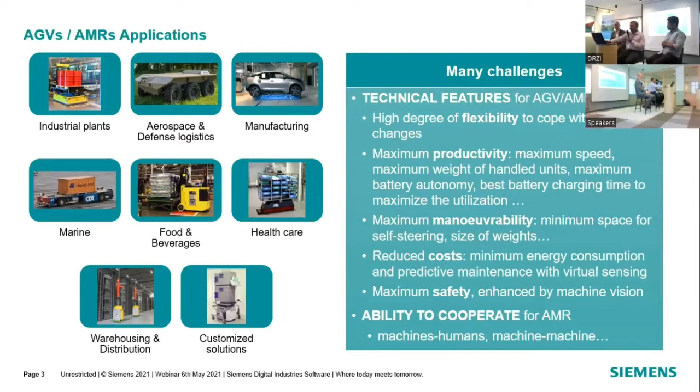Then, as I mentioned this morning, it's not how good your product is. The most important is a good product coming to the market faster. Okay, that's the most important. Everybody is rushing for time, and only those who bring the product faster are the winners and survive in the market, right? So these are the challenges that AGV and AMR manufacturers or designers face.

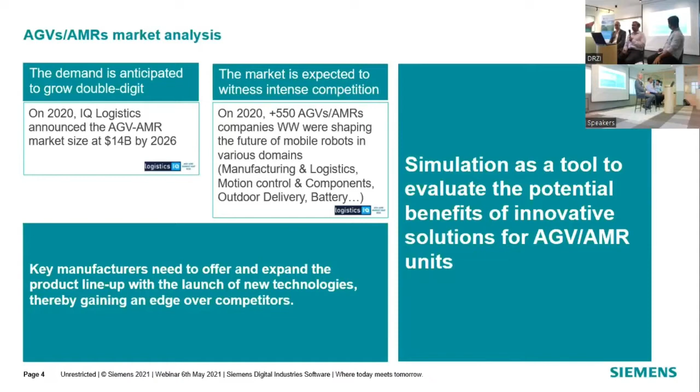And this is what I want to share also, how we see the market and its potential. You can see this is around a 2020 fact, and almost 550 plus companies are looking into that, developing different concepts, and they see logistics as one of the bigger things.

So now, what are the requirements? If you are going to design a new AGV, what are the typical challenges? The first one is sizing and validation, the same as the previous session. An AGV is going to work with batteries and a motor, so this needs to be optimized. I cannot put too much power when the battery has less capacity. So I need to optimally balance so that I put the right motor as well as the right size battery. The second thing is how this is going to work in the actual environment, virtual commissioning.

Then the third one is, if this is autonomous, how it senses and how it takes decisions also needs to be simulated. Then there's range, because this is what everybody wants to maximize, right? How much I can get on a single charge. The other two things are more related to how this is going to perform in the real world: how it can sense the environment, and how it can integrate the rest of the things like material handling, if you have pick and place or any specific arms.

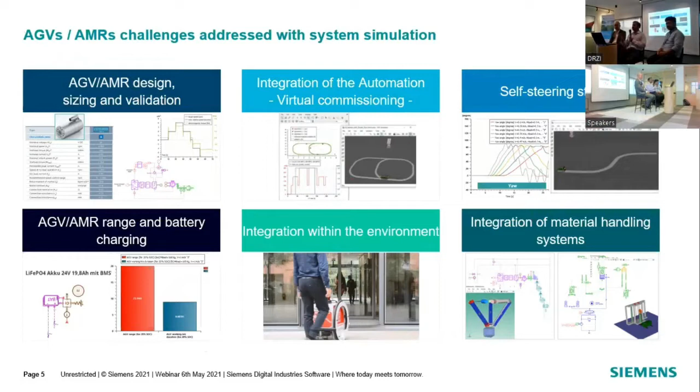So now, this one slide summarizes what we have. What are the solutions? The topmost solutions we call system simulation, and they can validate the designs well before you build the CAD models. So you can think about using X number of batteries in series and cells in parallel, then take the motors and see how this is going to work before the CAD model.

The second set of solutions is what we call 3D simulation. Basically, you bring your CAD model, your CAD geometry, then you simulate it for structures, how strong it is, and how it's going to behave in terms of stability and all. The third one is more about test.

So whatever we simulate, we need to also verify that this is accurate. So we have the test equipment. We can see there are a number of data acquisition systems as well as test-related software. So I'll go one by one, just to brief that.

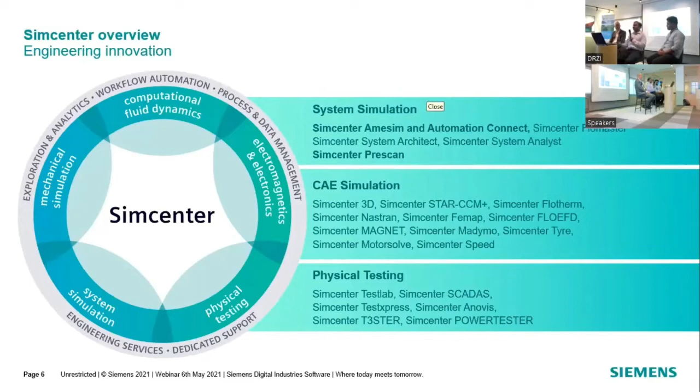So the first one is the system simulation, and in this system simulation, you can see this value. The whole AGV is comprised of multiple systems. You have mechanical systems, you have electricals, controls, there are multiple things. They all have to behave together. So this solution helps to build your model in the virtual form. You can see there's electrical, fluids, thermal, mechanicals, and so on.

But basically, if you ask me in another word, I would call this the Lego blocks of engineers, right? So you can see here each block you can stack together and then you can build your models and validate your models. And the advantage of this is you can see in this picture, this is a green color, and this is a purple color, right? This is electrical. So each color represents a different set of physics.

So basically, you bring a battery, then you wire it, you connect the motor, then the motor converts the electrical energy to mechanical energy. Then you use the gear systems, that is the mechanical systems. Then if there is heat dissipation, there's a thermal model. So in a way, it is a Lego block. You stack together and see how the whole system behaves, how long you can operate, and then you estimate.

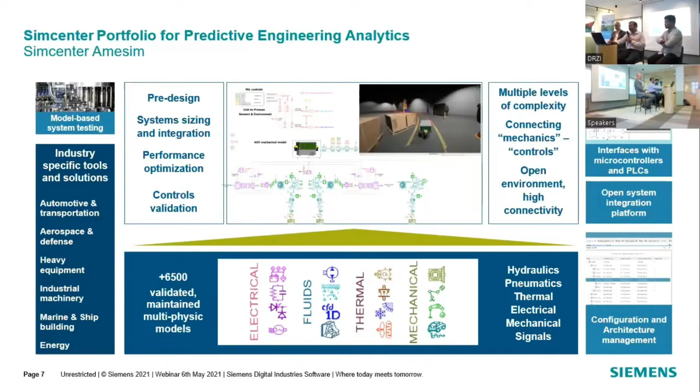So the next set of solutions is more specific. The previous one is a solution for mechatronic systems, so you bring different systems together. The next one is more on autonomous-specific solutions. Here you can see how this tool is working. So basically, autonomous systems behave in the same way as humans, how we recognize the environment and how we take the decision based on that. The only difference is they use camera, radar, LiDAR, ultrasonic.

So these inputs need to be validated. This input needs to be collected. Then you develop the algorithms based on the recognition. Then the systems take the decision. And these control logics, these algorithms need to be verified. So in case you see a person or somebody is moving, then you can decide this AGV needs to be stopped, or maybe take a left and go, or take a right and go, right? So this needs to be validated on the basis of how you develop the algorithm based on the radar inputs and so on.

So basically, the Prescan solution is a tool that can also talk with the previous system simulation, Amesim, right? They can talk together. So this tool verifies your control algorithms as well as autonomous capabilities, whereas the rest of the whole vehicle behavior can be verified in Simcenter Amesim.

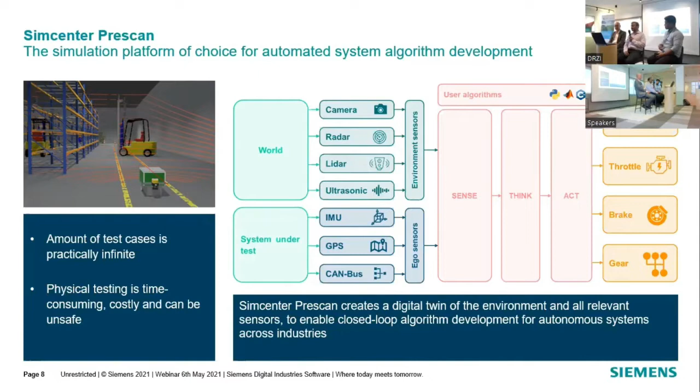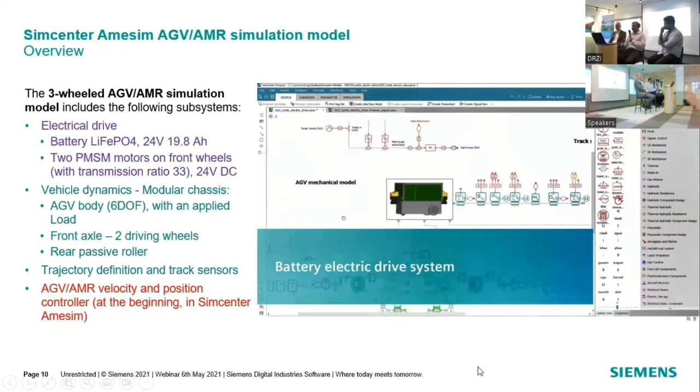Here you are modeling the AGV, and you can see some of the physics is in the electrical systems. Then they are connected to the mechanical systems, that is the tire and the gearbox, then the electric motor. Then you can define your trajectory at which this AGV needs to go, right? Then you can also trigger the scenarios of acceleration, steady speed and stop. Then you run the simulation. It can simulate the battery behavior as well as the vehicle behavior.

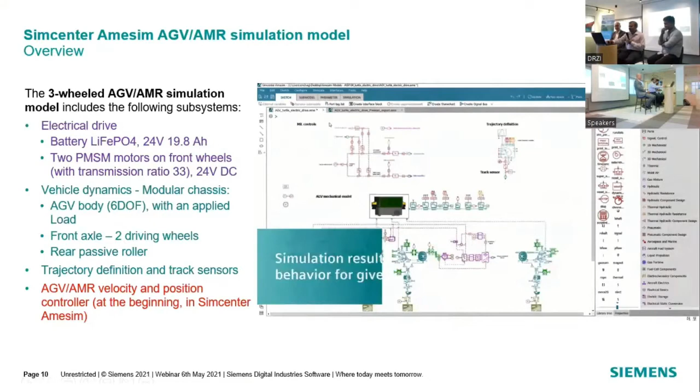So the next one I wanted to talk about is the results. For example, what is the maximum speed I can use? And what if I increase the height of the load, right? So these are the different scenarios. If you see here, this is the solution showing how, by increasing the height or increasing the speed, this will deviate from the original intended trajectory, right? The same thing goes for the velocity increase at different trajectories. You can see the performance.

Then you can also see other studies by increasing the weight. Of course, if you increase the weight, the electric motor is going to lose its speed, and you can also see how the trajectory is going to change, right? So yeah, there's a height increase, the shape of the trajectories.

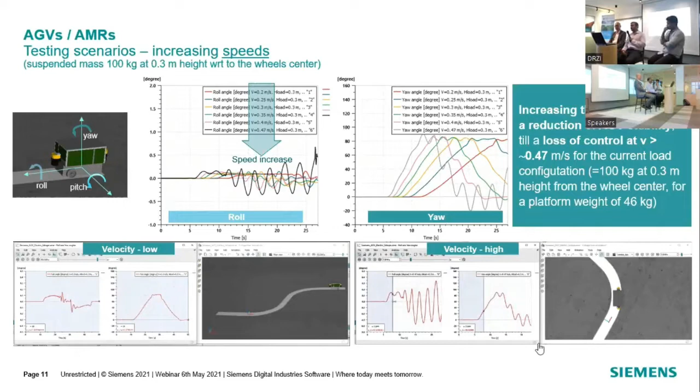The advantage is, before you deploy this in the product in the actual world, you know how this is going to work, and you can virtually fine tune your PLCs against your product. And there are two ways to do it. One is called hardware in the loop. The second one is software in the loop.

With software in the loop, without the physical hardware, you almost mimic everything you have. But with hardware in the loop, when you have physical hardware, a real PLC, you can connect and exchange data with your PLC. That's the difference. Both are possible when you have models in the Amesim.

So this is one of our case studies that I wanted to share, SIMOVE, right? And here, how concurrent engineering, hardware and software in the loop work together, and how this can be validated in the various stages of the development.

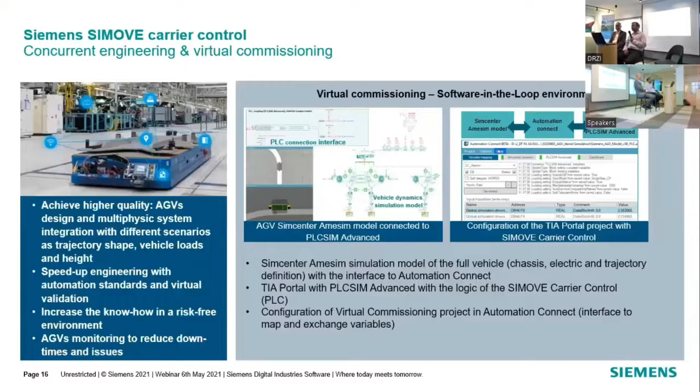The next one I wanted to talk about is more on the software in the loop. So in software in the loop, probably you have teams doing different things at the same time. For example, if you have a controls team using MATLAB, or a mechanical team using CAD models and mechanical models, these solutions can connect with the different systems, and then you can optimally fine tune your physical models.

If you change the motor, what will be the impact? In the mechanical aspect, it is going to affect some of the stability. But if you modify some controls, you can also fine tune the control logics in this.

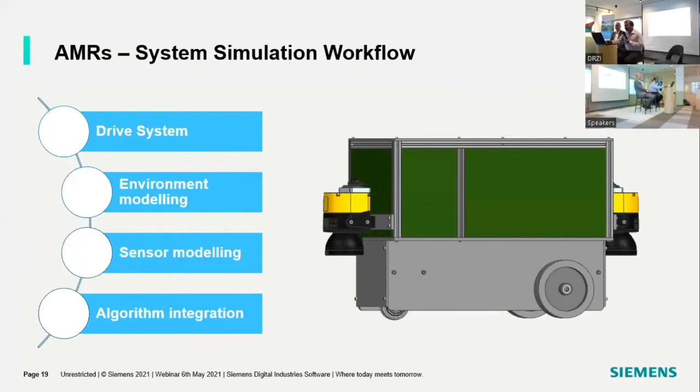The next one I want to talk about is the interactions with the surroundings, right? So this is about our autonomous solution. As I mentioned, one of the things you probably want to buy from suppliers and integrate is a drive system, or you also buy the batteries and so on. Here there are a number of battery models, and you also have drive models. So you can just drag and drop like a Lego block and build this whole system.

What if you change this? What if you change the tire? Or what if you change the drive or mechanical gearbox? You can see the influence on driving distance or charging frequencies and so on.

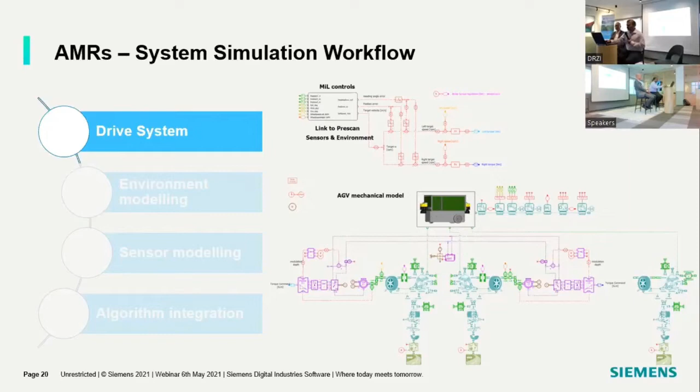The next one is a very unique way you can create your environment. The AGV could be used on the shop floor, in a town or city area, or in the airport. So here the solution is you can create a virtual environment, right? You can create roads, obstructions, and also some pedestrian movements. You can create these models. It comes with a lot of libraries.

So if the AGV is going to handle, let's say, rainy conditions, or snow conditions, or water, you can model the different environments. So in this video, you can see that you can create pallets, right, on the shop floor. You can also see that there is an obstruction. Once you create these obstructions, you can visualize them in the 3D model, so you can see there are some obstructions for the AGVs.

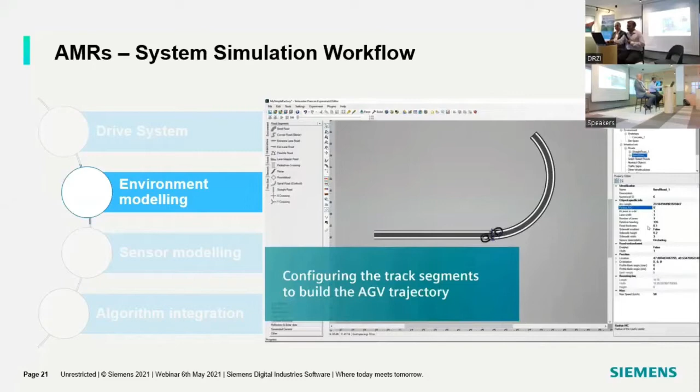Then you can also create the pedestrians, or the workers. So what should this AGV do when someone crosses the path, right? That scenario can be triggered also. Then you add the sensor model. What sensor are you using? Of course, you probably buy the sensors from different suppliers. So you can configure the sensor models, radar models.

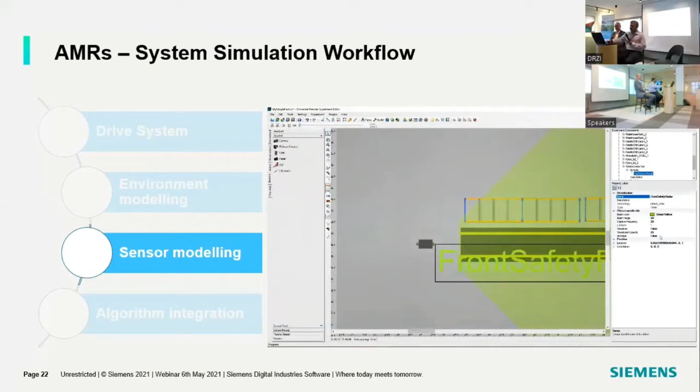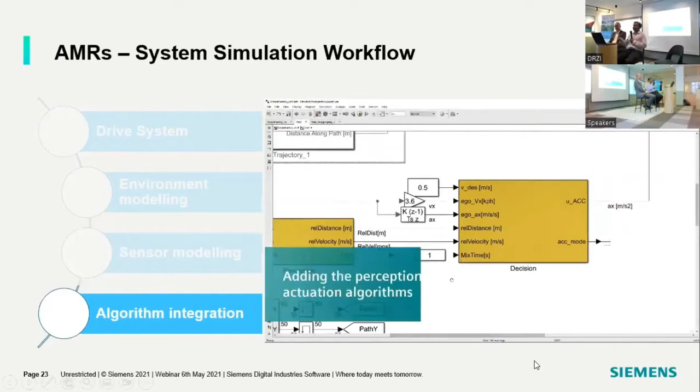Then you develop your algorithm. So basically, you create your mechatronic systems, then you create the environment, then you model and configure your sensors, then you run this and validate your models: how should the AGV behave in that particular scenario? Should it stop or should it bypass? So you can see here this simulation model runs based on your sensors and the environment. Then you can see if it is stopping. So you can run these animations to see how the AGV is going to behave.

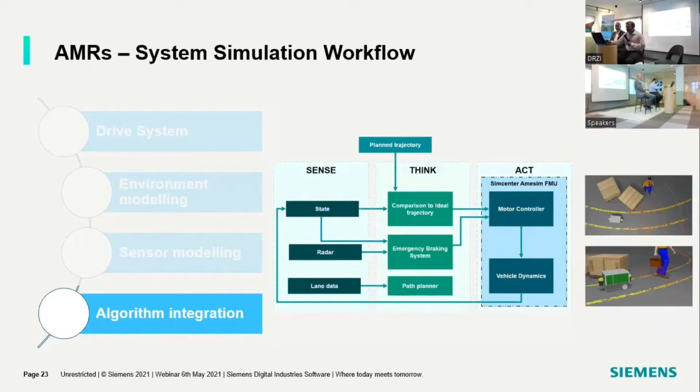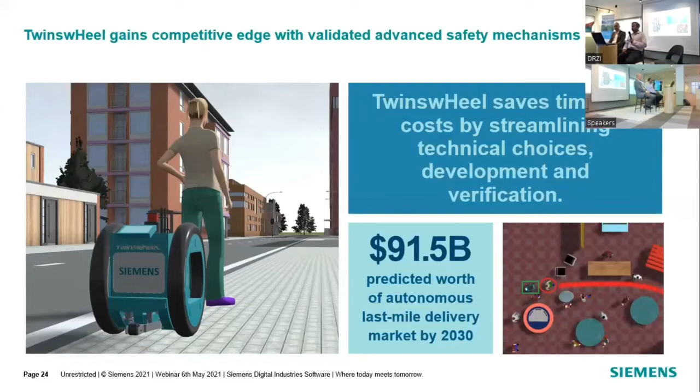So this is about the overall solution, right? Now the next one I wanted to talk about is our customer case study. The customer uses our solution, that is Simcenter Amesim, and they use this to validate the models. Then you can see the testimony of the customer.

Just give me... Sorry, the audio is not working.

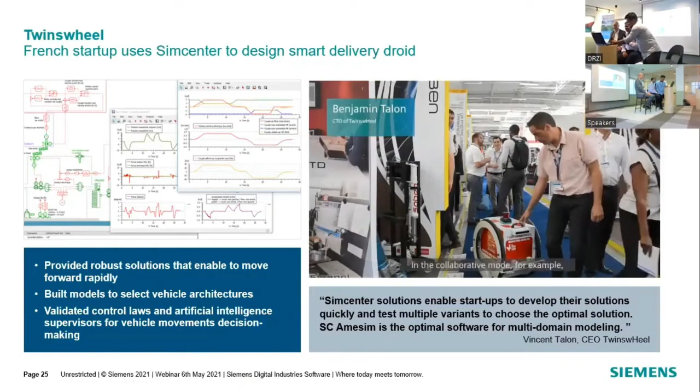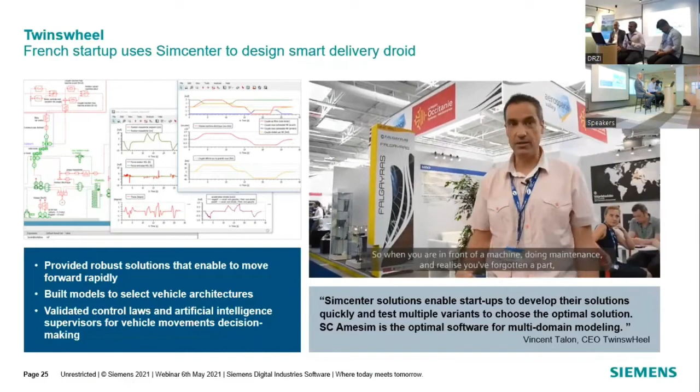Okay, so I just showed our customer case study, right? How they build this model, how they integrate and simulate the charging and discharging, as well as the different kinds of architectures, and how this AGV responds to the environment given its sensors and different surroundings.

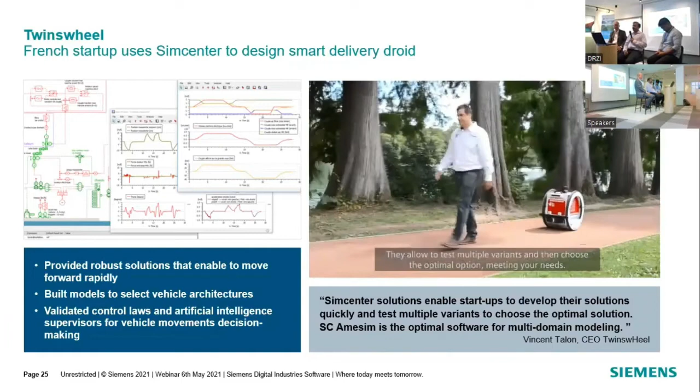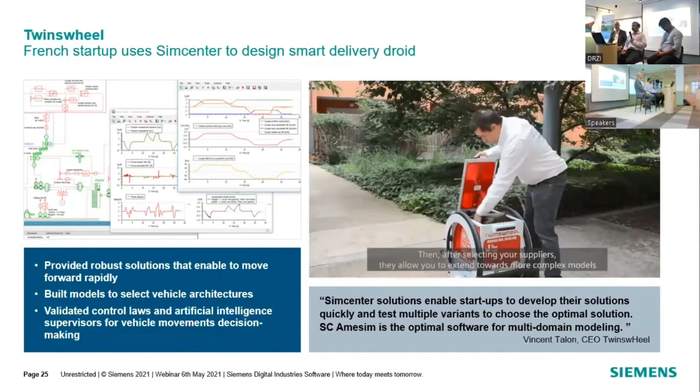So here, what it does is it carries the weight, and it follows the person, right? So it needs to take certain decisions in terms of obstructions, and these obstructions can be modeled in PreScan, but the rest of the vehicle systems is modeled in Amesim.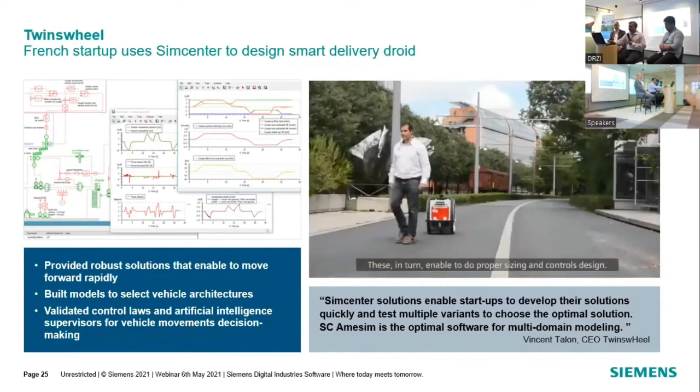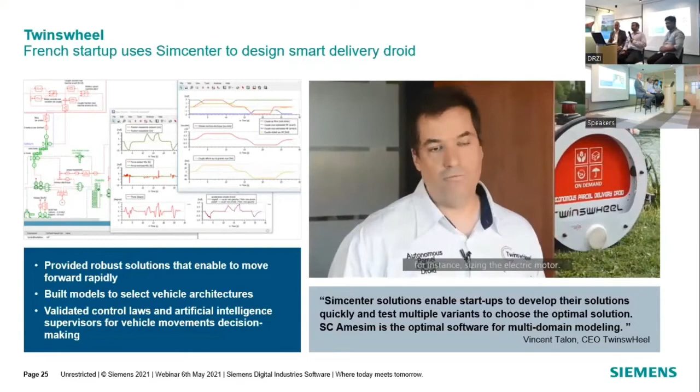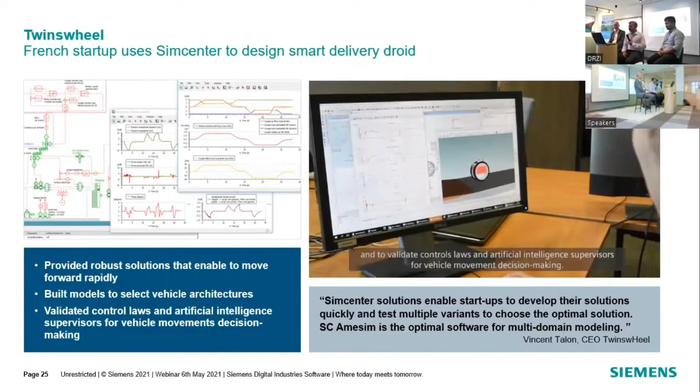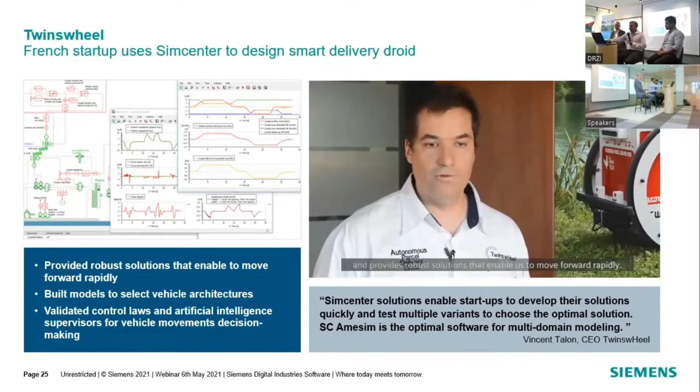So on this left side screen, what you are seeing is the Simcenter Amesim model, and you are seeing a number of graphs, but basically the software is capable of simulating the driving range, how fast it can go, velocity, accelerations. You can name different parameters from the simulations. So basically, it just follows the person and carries loads.

This is also a French startup, our customer. Like I mentioned before, we have a startup program specifically if a startup wants to leverage our end-to-end solutions. Feel free to engage Melvin and his team. We can do the same as what we have done with Twinswheel. We can support this with our startup program.

The second thing is, if you are academic, we have an academic program. The academic program is not just throwing a bunch of software, but the most important thing is how to teach the students. We have extensive learning curriculums, so the professor can assign the courses to the students, and when they complete, you can also assign the certification to the students, which will help lifelong in the LinkedIn profile. You can see the Siemens endorsement on that particular course completion, and that will be useful in the career as well, right?

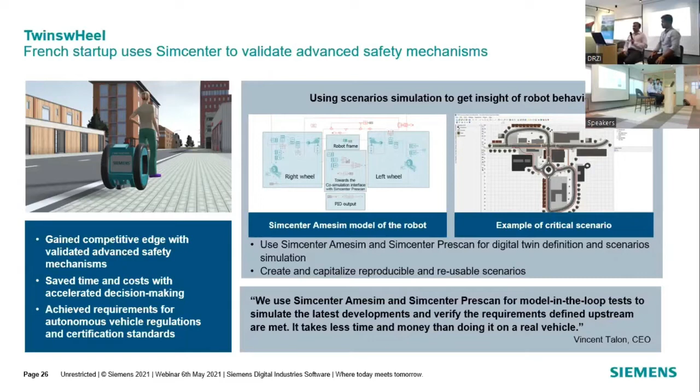So these two are the things that I wanted to highlight: one is for the startups, and the second one is for the faculties. The other thing I also want to highlight is the AI driving agent: how we can fine-tune the AI algorithm by sensing and adapting based on what it learned from the physics. In this capability there is a mechatronic physics model inside, and this model simulates how the product is working. So in case this product is experiencing a new situation, it can quickly validate that scenario in the simulation model.

For example, when they designed it, they may never have come across a situation of encountering snow, or a wet floor, or other scenarios. But if you have a physics AI-driven agent, the software knows the physics of how the friction is going to change and how this affects the tire grip with the road. So if the vehicle applies the brake, it may skid. This skidding can be simulated by the physics, so that is possible in this simulation.

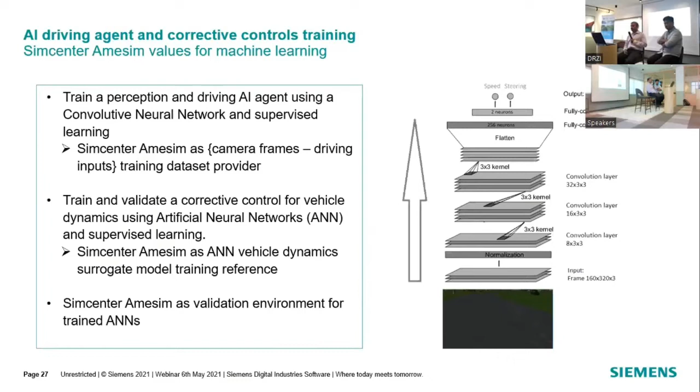The next one I also want to talk about is battery range and charging. One of the main challenges when we design is to precisely size the number of cells in series and the number of cells in parallel to size the battery. So here, with the battery pack simulation capability, if you have a supplier data sheet, you can import it and create the models.

Then if you have electric motor models, you can bring that particular motor and drive this and see how long it can drive with that particular distance. So later in the slide also you will see you can create different kinds of scenarios, right? Your tracks and also the loops you can create. So you know how long, how many hours you can operate, and how many times in a day you need to charge, whether you have a sufficient backup plan and so on, right? You can plan it well in advance when you are designing it.

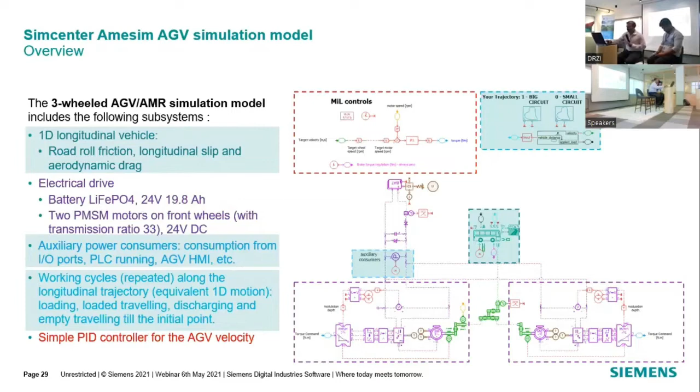So, the second one I want to talk about is scenarios of charging and discharging. Of course, when we design the battery pack, one of the main considerations is charging and discharging, as well as the operating conditions. We don't want to spend the whole night charging, and in 2 hours it drains again and goes for charging. So we need to factor in these operating conditions.

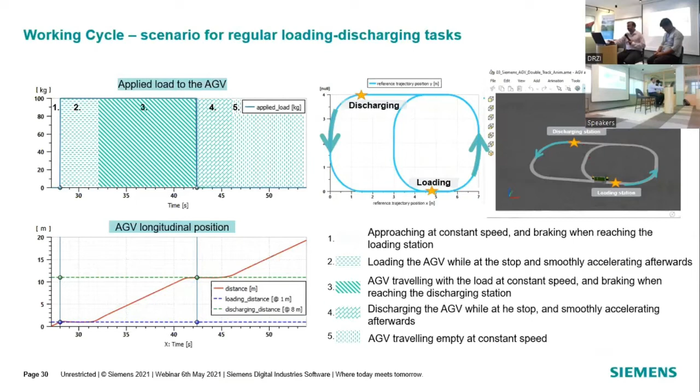So you can define the loops, how many times it is going to make a turn or operate on the shop floor before it goes to charge, and how many hours you can operate to get the maximum output. And in case this is not going to cater for the full hours, let's say the workers are working for 8 hours, if this is going to supply maybe only for 4 hours, how many backups you need, right? So all this can be planned. You can apply the different loading conditions. You can also see the discharging as well as the loading and driving scenarios. Then you calculate the operating conditions.

The next, or I would call it the solution that I wanted to calculate, is the simulation capabilities related to the different testing scenarios with the battery SOC conditions. One of the factors is if I am going to give a warranty of 2 or 3 years, I need to make sure my battery SOC or battery condition is still valid at that period. Otherwise, I will end up with all the recall requests. So here you can model the battery aging capabilities and also different SOC conditions. We cannot expect that in every scenario the battery is in full condition.

So in these simulation capabilities, you see that the simulation results are compared with the different load conditions, whether the AGV is fully loaded or partially loaded, and how this is going to affect the duration of the operation as well as the SOC conditions.

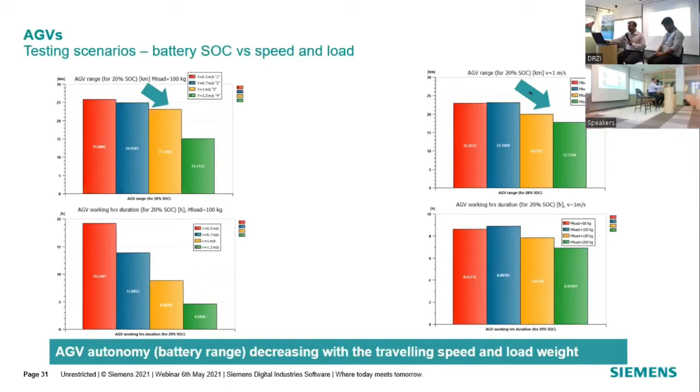Okay, then this is just to summarize my capabilities, right? In the beginning, I talked about the mechatronic solutions. The mechatronic solutions help to build a model which is electrical, typical mechanical systems, and also thermal models are the common use case. The second one I was talking about is the autonomous capability. The autonomous capability can be integrated into the mechatronic system so that whatever logic and algorithms we develop are validated in conjunction with the mechatronic simulations, and how these AGVs behave.

Then the next one is productivity, right? The conventional method of loading and unloading, and how efficient is this? Is it worth investing because of the downtime in charging and discharging? We can also simulate that. Then we also have the capabilities to maximize the payload. If you increase the load, how much the distance or range is decreased, and those kinds of simulations.

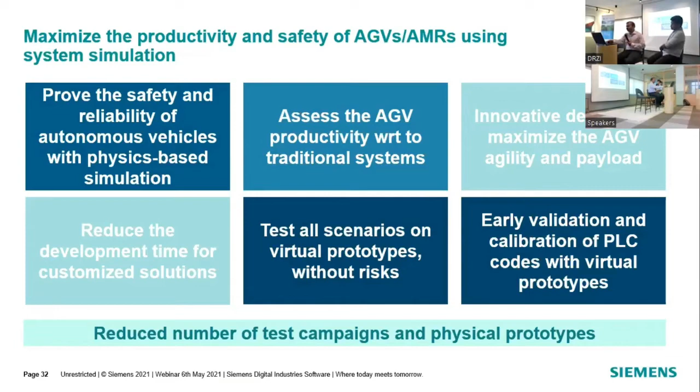And to summarize all the other things, whether I want reduced time or prototypes, it's all in a virtual form. Everything I am talking about is in virtual form. So I don't spend my money and time on prototypes. This helps me to be almost certain my model is going to work. And changing here is a few minutes or a few hours of work, whereas if you change the physical prototype, you probably spend thousands of dollars as well as manpower and days of work, right? So this is where simulation helps to bring the product much faster and at lesser cost.